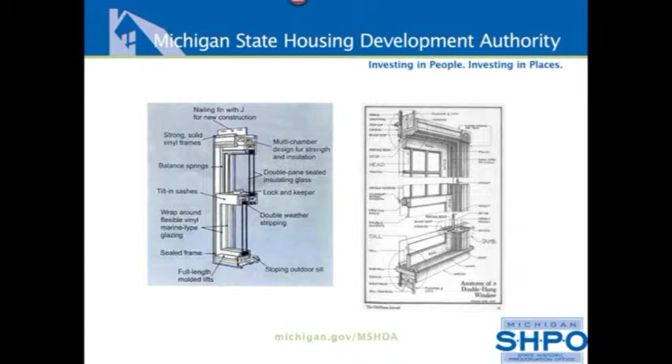I can't recommend storm windows enough because you can have exterior storms and interior. They in themselves act as a defense against weather, and when you pair a wood window with storms, it's either just as energy efficient or more energy efficient than a vinyl window with a storm. And I'll take that argument to the bank because we've done a lot of different testing on windows here in Michigan.

So let's kind of move on, and we're going to talk about exterior activities that you can conduct on your own. And a lot of the things I'm talking about today are low cost, middle of the road expenses that you may not have to hire someone for, that you can actually take on your own. So here we are on the exterior of a house, and we're looking at some of the joints where two different wood members meet, or where the clapboard siding is meeting, and there might be some gaps, or it has just been weathered over time.

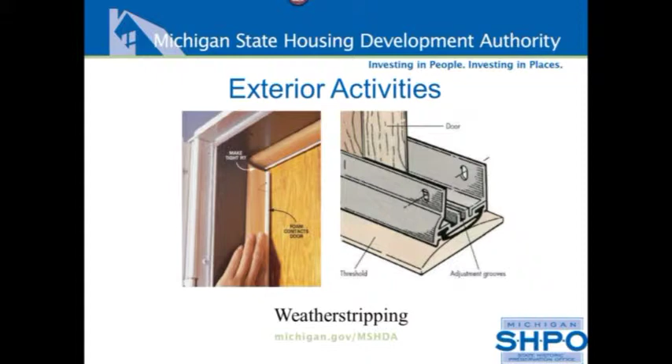So first, sealing and caulking is very important so that you can keep pests out, vermin out, any kind of weather out, moisture out. Where there's a way, water will find its way. So you can remove debris from gutters and downspouts. You want to make sure, and I'm going to get into more of this, that your gutters are sloped properly and downspouts drain water away from the house. And also, you can make certain that you have weather stripping around your doors and entryways. And this is something you can do on your own.

And also, back to exterior activities, you want to make certain that you clear vegetation and direct water away. For instance, you can inspect the grading at your house perimeter to slope water away from the house. When you have any kind of vegetation against your house, and believe me, I love ivy on a house just as much as the next person, but I know what it can do to mortar joints. The ivy, and any other kind of vegetation, can pull that mortar out, and then the brick, the masonry, will fail. So where there's vegetation, remember there's moisture against your house.

Let's move on to paint. Not a lot of folks consider paint as a barrier for weatherization, but it is. It's more than just an aesthetic feature. It actually serves a weatherizing, utilitarian function. So you want to maintain paint on wood and metal. You want to make certain to inspect exterior trim pieces for the paint to not be blistering or weathering. Make sure that the wood has a tight fit, there's no dampness or deterioration. So you can see in this image that over time the paint has failed, or there's moisture causing that paint to blister.

So often people say, Jessica, well, I'd like to clean my building, and I have a lot of clapboard siding that needs to be cleaned. And these are two images that I took of someone that called me and said, I think I might have made the wrong move. I pressure washed my clapboard siding, and now it's damaged. And I said, okay, well, when it comes to washing your house, it's not just the pressure, but it's the distance. So what's the PSI, the pounds per square inch?

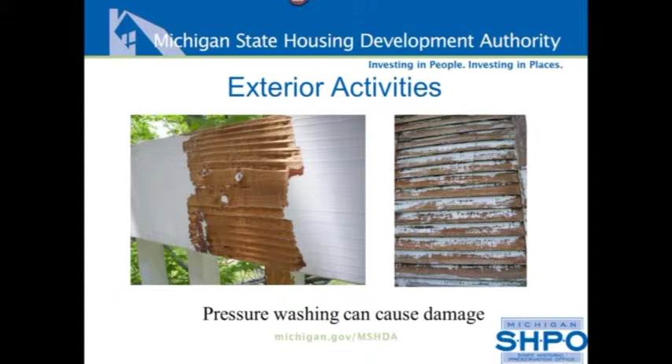How hard were you hitting that wood, and how close were you? You should not pressure wash your wood. You can actually clean with water and soap, and you can clean your paint that way. What you can see on this is that when they pressure washed, they removed the paint. And remember, that paint is like a barrier to water. So when you remove it, you're exposing it to different elements.

Same with masonry. Never, ever want to sandblast a brick. Here we refer to the Secretary of the Interior Standards for Rehabilitation, and I call them our Bible, our 10 Commandments that we refer to. And one of them is use the gentlest means possible when you're cleaning a building. You want to make certain that what you're cleaning a building with is softer than the material you're cleaning. So I hope that makes sense. So you don't want to blast a brick with sand.

This is the image I took where someone sandblasted or pressure washed masonry, and it's removed that exterior fire skin on the brick. That's really the protective layer of the brick that was closest to the bottom of the kiln when the brick was fired. So when you've removed that, the masonry underneath that fire skin is just like sand. It crumbles in your fingers, and you can see where it's been dented. And I'll get into a couple other images. Let me see. Oh, I'm going to jump ahead and go back.

But here's the image of a wall I took recently where they had sandblasted, and over time, they had to go and patch the brick masonry. And you can see they patched with Portland cement, which is concrete. And the next image is where they sandblasted as well. I would touch it and it would just flake like sand. You could pop your index finger right into a brick. So you can see what pressure washing does over time. That brick has essentially spalled off out of the course, and once your exterior is exposed and is soft like that, it's just going to be a vehicle for further damage. Let me jump back.

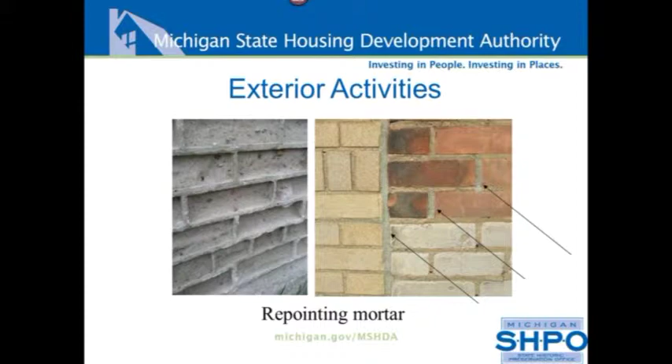Okay, so I mentioned insulation, conditioning, the ventilation of windows, those being very important features. Insulation and ventilation together are called conditioning. So when we look at attic insulation, we're going to also look at ventilation as part of this whole conditioning system. I'm jumping right into insulation now because it's a really hot issue up here in Michigan. Our climate isn't too much different than Ohio. However, we have the Upper Peninsula that's like another part of the world, because it gets extremely cold with crueler winters and snowfall than we get down here in mid-Michigan or southeastern Michigan where Detroit is. So insulation in Michigan is a very hot issue. We have to have our homes insulated.

Earlier when we had started this discussion, we talked about the building envelope, and the most important critical area for insulation is your attic. And so what you want to do in attic conditioning, you want to make sure that you have enough insulation and that you're keeping that building envelope insulated. And the attic should actually be the same temperature as outside.

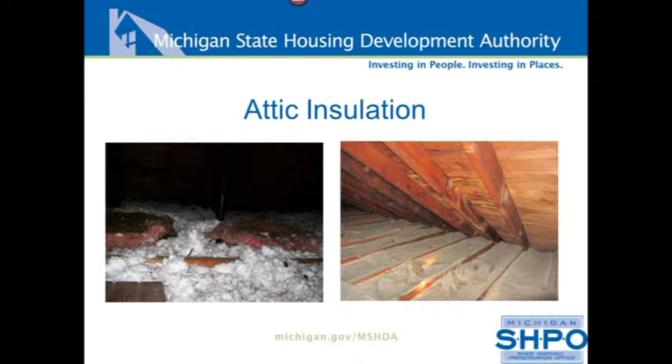And when I first learned that, I thought, oh, I guess that does make sense, because it's constantly moving. It's moving that cold air in and out through gable vents, through attic vents, through roof vents. So here we recommend 18 inches of insulation in your attic, and you can add over existing insulation. You want to make certain that you insulate all your ducts, your exhaust fan, those light switches, things we talked about.

Often I get the question, Jessica, can I put insulation over top of existing insulation? And yeah, that's fine. It depends on what's existing. So it's a case-by-case basis. Do you have fiberglass on the floor right now of your attic? Do you have cellulose? We need to talk about what you have.

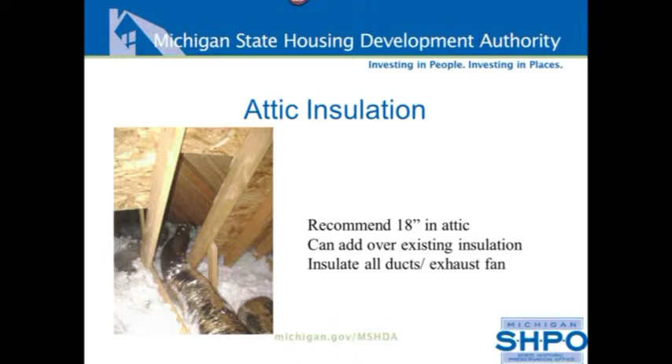So let's briefly, let me see here, move on to, I thought I had another, there we go, I'm sorry.

One is, say for instance your roof has a leak. You can see it from the outside, but you can't see it from the inside because the inside's blocked by the insulation that's been laid. You can't see where it is leaking, and you're having problems. Or say some of your roofing members on the outside, maybe your shingles are starting to curl up. You don't know where the water's coming in. You can't address it from the inside.

Another reason is spray foam, and we're going to get into a little bit more conversation about that, but spray foam is not reversible. Actually, the most energy efficient method of insulating your attic with fiberglass batts is putting the fiberglass down, with the kraft face paper up, and insulating from the attic floor. That would be the most appropriate, because once you hot cap your attic, you've negated the ventilation system.

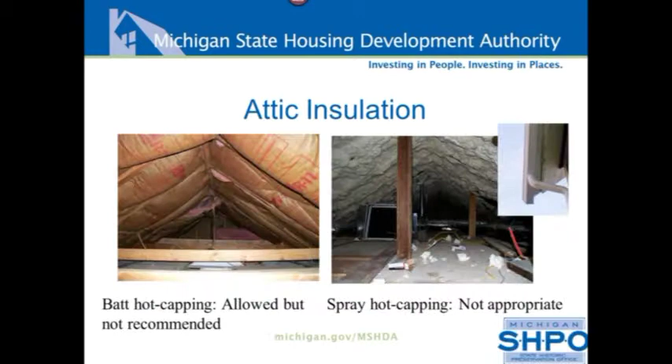Now there's two types of spray foam, closed and open. Closed cell spray foam is almost entirely, 99%, not reversible. So when it goes on a building material, just know that it's not going to be able to be removed. I mean, yes, you could probably stand there and sand it down, but it won't be able to be removed.

So the reason I mention that is that we deal with a lot of demolition in Michigan, and say you would like to repurpose building materials, they cannot be reused. They will end up in a landfill with spray foam on them. We suggest a more environmentally friendly approach, which is blown cellulose. And blown cellulose has been around for some time and is a more natural material.

Spray foam is still rather new, and we don't know what its effects are on traditional building materials. So it's a modern material, so we're still somewhat hesitant to recommend that. And in fact, we've received calls where contractors have blown spray foam into a wall and the house has literally been lifted up off of its foundation. So I just wanted to let you know that fact about spray foam.

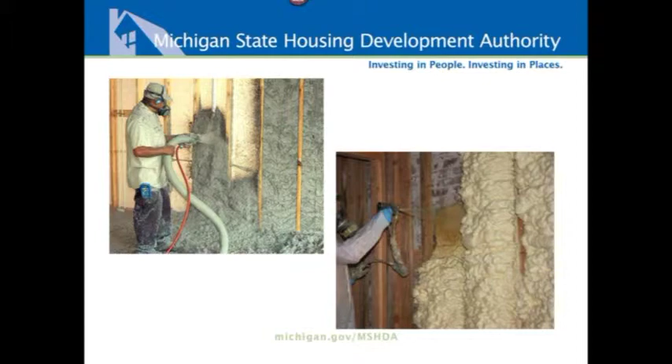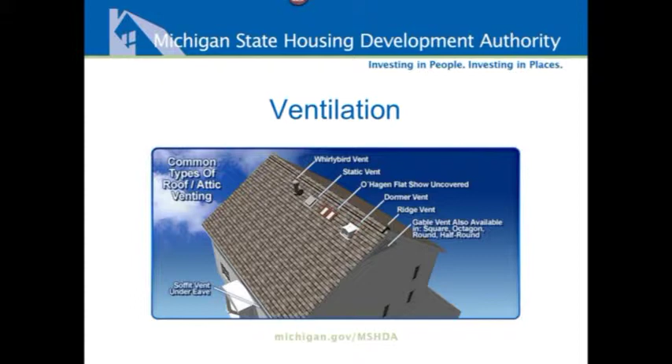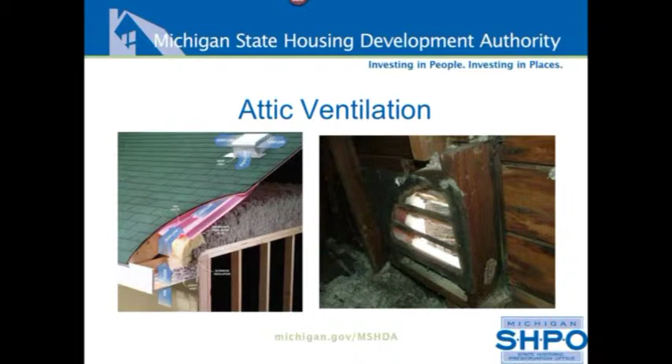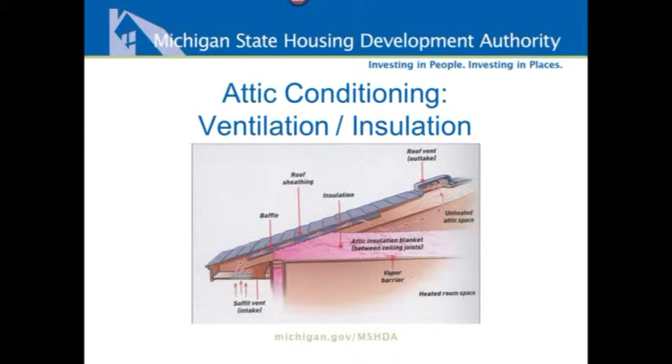So let's talk a little bit about wall cavity insulation. Back in 2010, Michigan received an unprecedented amount of funds from the Stimulus Act for weatherization, and we had a lot of contractors coming into the state to provide weatherization measures here. One of them was wall cavity insulation, and we dealt with a lot of different cases where the contractor did not install the wall insulation properly.

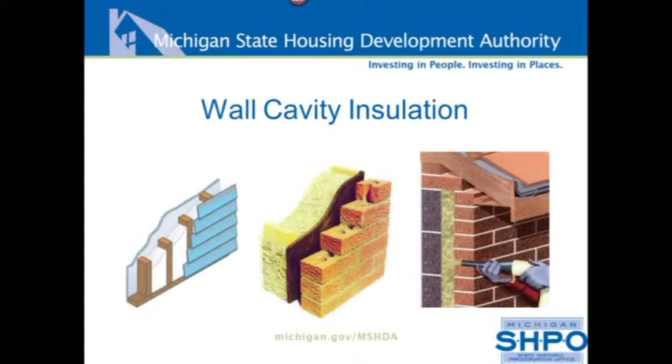So they would go in from the exterior, and as you see from these images, there are different ways that you can insulate. You can remove a clapboard siding and insulate beneath that. You can go in and insulate from the inside, as is evident in the middle picture. You can go from the exterior and apply insulation through a mortar joint. You want to make certain that you blow insulation into the wall cavity between, say, the brick veneer and the drywall. Fill a plug with wood putty and sand it and paint it to match.

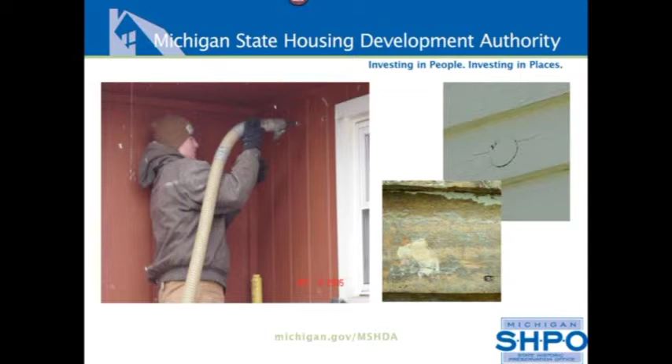So another area, we talked about the attic, we talked about the wall. Now we can talk about crawl space conditioning. So you want to make certain that you have moisture control, that it's ventilated, air sealing, insulation. Not all crawl spaces have to be insulated, but if you decide that you want to, where you install and how you install it is very important.

It's best to limit the insulation in historic buildings to attics and crawl spaces around pipes and ducts to be the most cost effective. So here what we recommend is that you can use rigid foam board against the concrete masonry. The concrete block is a method of insulation. And here they've laid down insulation to encapsulate the entire crawl space.

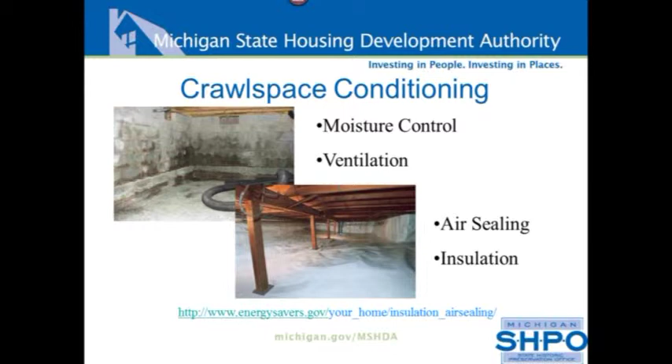Another area that we look at is the rim joist or the sill plate in basement conditioning. So we do not recommend spray foam in the attic or in the wall cavities, but this is an allowable place that you can put spray foam, and that's at your rim joist or your sill plate. As you see on the image on the left, the foam expands to fill all the gaps, holes, and joints susceptible to wood movement. The spray foam sticks to the rim joist, eliminating the condensing surface. So that's an allowable area for spray foam.

Let me say one more thing. Adding insulation to ductwork in unoccupied spaces, such as a basement, is also acceptable. You can add unfaced insulation to band joists or sill box locations, pipe wrap, and hose bib insulation at the exterior wall as well.

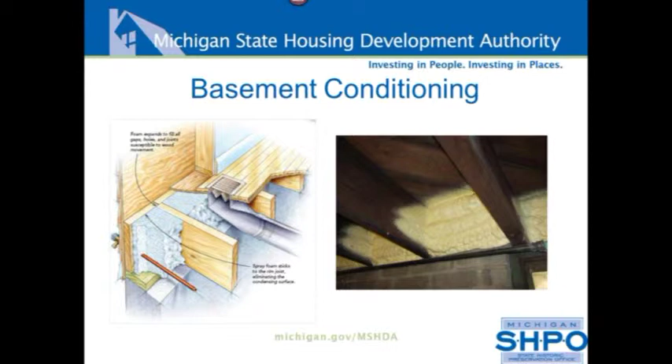So these are three measures I mentioned that we've dealt with here in Michigan, where people have had an energy auditor come and do an energy audit of the home, looking at where air is leaking into the home and exiting out of it. A professional energy audit comes with a fee, but it gives you the benefit of a building performance expert's experience and recommendations. You want to make certain that you hire an independent auditor, one who doesn't represent a specific product or system.

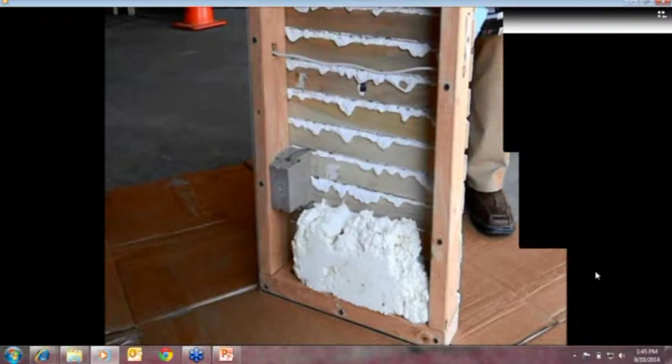So as you can see, we just filled it, and this is what happens. It's very boring. It's not that exciting, but the end result is extremely exciting. So I'm glad I can keep you on the hook so you can get the after photo.

We usually take this wall cavity with us around the state when we travel, and I'm sorry that I'm doing this over webinar, because I have all sorts of different insulation types that I like to hand out, from blown cellulose to newspaper to blue jeans, different things that insulation companies are pushing here in Michigan, just to give you a variety of different insulation types and to not just be using a chemically based product, which is spray foam. Spray foam has a curing process. It says 24 hours it takes to cure, so that's what we did.

We looked at it, like I said, on a Thursday. We came back on a Friday, and it was still wet. The spray foam was still wet. It hadn't cured or settled the whole way. And so we left it over the weekend, and we came back on Monday, and it was drastically different than when we applied the spray foam. I have that wall cavity in my office. I'll take a picture and send it to Frank, who can send it out to you all. I apologize about that. It slipped my mind to take a photo of that after. I'm always dragging it along with me.